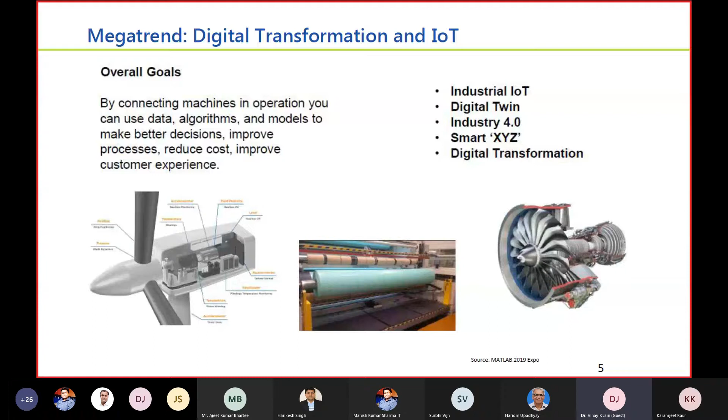So the Industry 1.0 era starts from the earliest 19th, or we can say the end of the 18th century, where we worked with mechanical machines which are powered by water and steam. So for this era we call it Industry 1.0.

And after that, by innovations, we reduced the mechanical efforts, and we come to the era where we invented and innovated in terms of electricity and mass production of products and devices, which we call Industry 2.0.

And later we come to Industrial Revolution 3.0, which started at the beginning of the 70s, where we use microprocessors, electronic devices, and information technologies to make production autonomous.

And then, in today's stage, we call this stage between Industry 3.0 and Industry 4.0, where we use cyber physical systems.

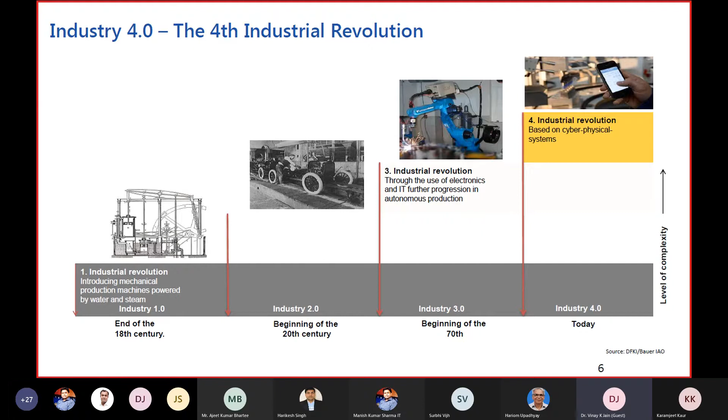So in the phase from 1760 to 1840, we use mechanical production in terms of railways and steam engines. And in 1870 to 1940, we have mass production of electricity, and products like cars and motorbikes come from assembly lines.

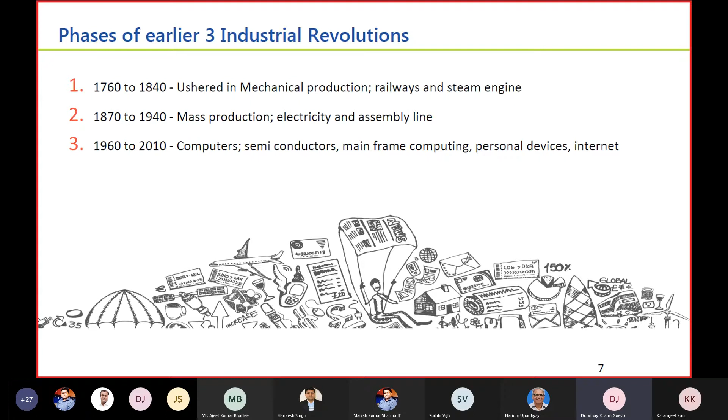And from 1960 to 2010, we have computers, semiconductors, mainframe computing, and personal devices. With the help of the internet, we connect all these things to make the process and life more easy, and drive innovation towards new products.

So for Industry 4.0, there are a lot of different definitions given by different societies. In Industry 4.0, we say it's a collective term for technologies and concepts of value chain organization, based on technological concepts of cyber physical systems, Internet of Things, and Internet of Service.

So it facilitates the vision of the smart factory, because over the last 5 years we have been focusing on making the factory totally automatic - we call this automation the smart factory. Within this modular structure, the smart factory of Industry 4.0 will create a virtual copy of the physical world, like a physical industry - a virtual copy of a physical factory.

So the benefit of these smart factories is that the decisions are decentralized. The smart factory or manufacturing process will be in a form of decentralization, meaning all the decisions are taken on their own - the machine will take its own decision, not a particular person making the decision based on the physical things.

So over the Internet of Things, cyber physical systems communicate and cooperate with each other and with humans in real time. This gives us a chance to communicate directly with the physical system for every device. A person can directly communicate through the medium of cyber physical systems to control the systems and see the overall picture of a particular device - whether it is working well, or whether there is a chance of failure of that particular part.

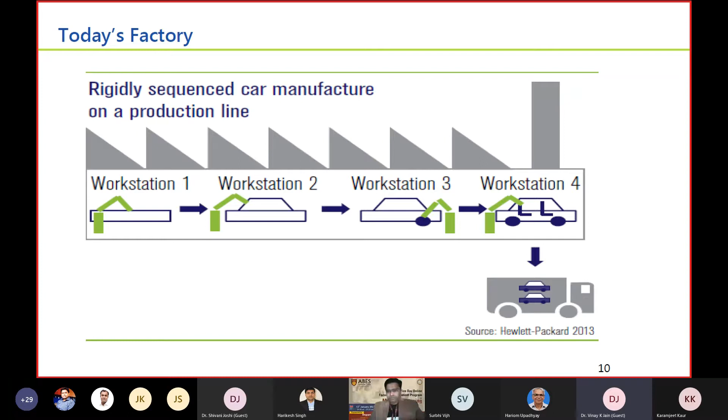The manufacturing happens in a sequential manner, and then it will be transported to different locations, protected for the transport.

In tomorrow's factory, we use a decoupled, fully flexible, and highly integrated manufacturing, where when we give raw material to workstation A, the factory will automatically decide which workstation the particular product will go to.

These types of smart factories will increase the efficiency of the factory, and we can produce more. We make the system more productive in terms of workforce and time saving.

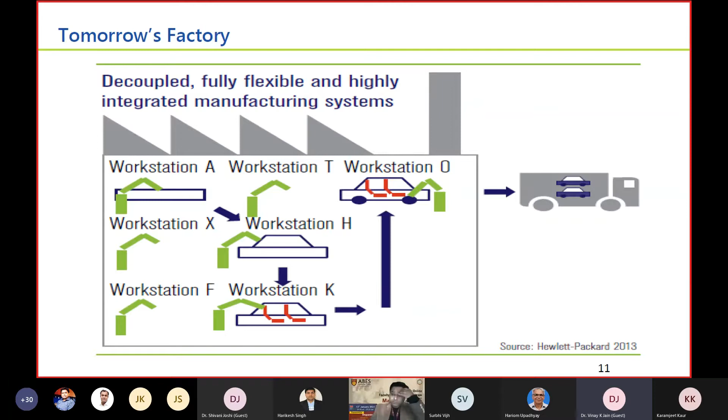In terms of Industry 4.0, how will it work with internet technology? It goes for technologies like Internet of Things, services, and data.

We have heard a lot about IoT. IoT will provide communication between different objects based on internet technologies, like RFID, barcodes, Wi-Fi, and Bluetooth.

For this, we need a particular address to identify a particular device. Currently we are using IPv6 addresses for different devices, which helps in communicating between them. So for IoT, every physical object will be equipped with some address, and it can communicate with a different object.

Second, we have the internet of services. It provides internet-based services to different processes, such as engineering, logistics, and production. It's just like service-based added value for machines, for people, for products.

Internet data is generated for all these processes, a lot of data. This data should be stored in a particular storage system, and we can analyze it through different mediums and platforms using technologies like deep learning, machine learning, and so on.

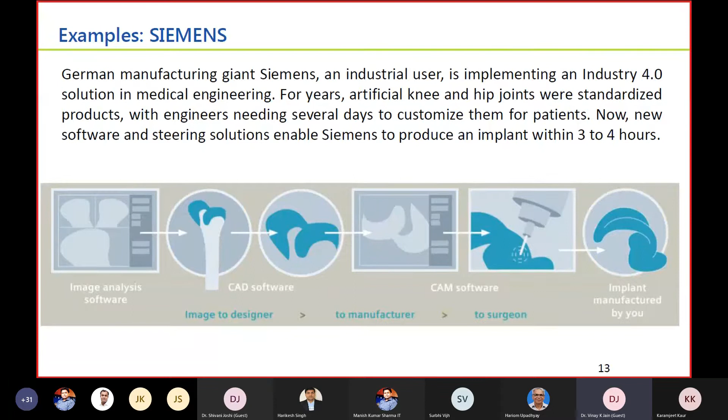But by using, as you can see in the picture, we have X-rays of the knees in the software, and we convert these particular images to transform them into an artificial knee for the particular patient.

Another company currently working on Industry 4.0 is GE, which had their own operating system called Predix. Predix is basically used to connect different industrial equipment. In a particular industry, there are many types of equipment connected through sensors, and these components generate a lot of data. When we connect all these components with Predix, all the data comes and gets stored in a particular database. So Predix gives new solutions for all the companies which generate a lot of data from different sources.

Some data is like OT system data, where we have the control process data of all the devices. We also have external data, like weather conditions, human resources, and all these things, clubbed in one particular space. By using this data, we can monitor, analyze, and know the events of a particular process. If we need that data to build models, like a digital model of a particular process or product or production process, by having data from the past, we can develop a new model on the basis of past data to analyze more accurately and form a new model or new industrial applications.

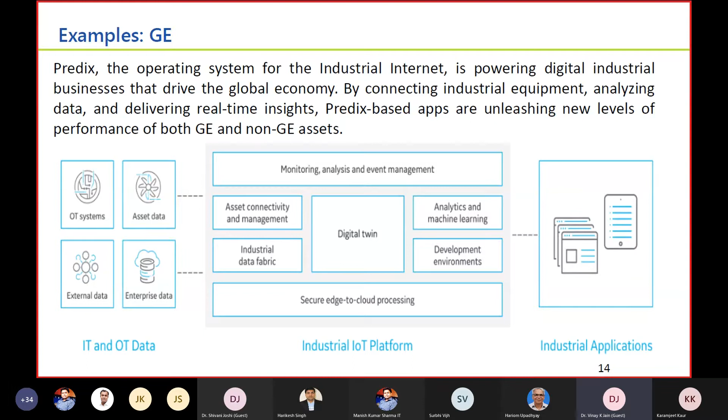There is another example for laser technologies: a German toolmaker called Trumpf, which developed a concept of a social machine, where we model a particular machine on the basis of the input given to the system. For this, we just give the details of the product, what we want for it. We assign the parameters to the particular product, and by using the Trumpf toolmaker, which is one of the best in the industry, it will give you the whole particular product in terms of accurate modeling.

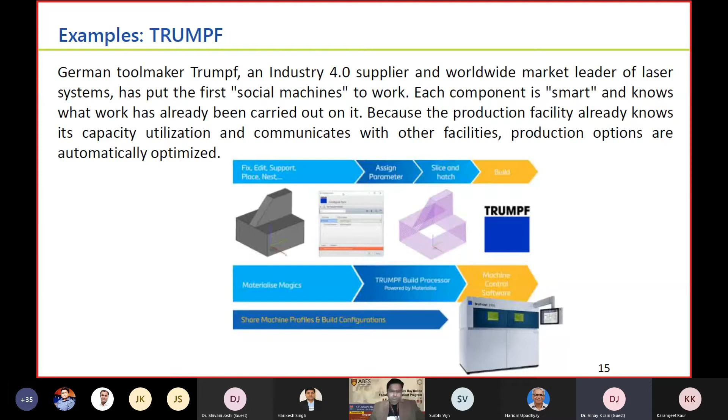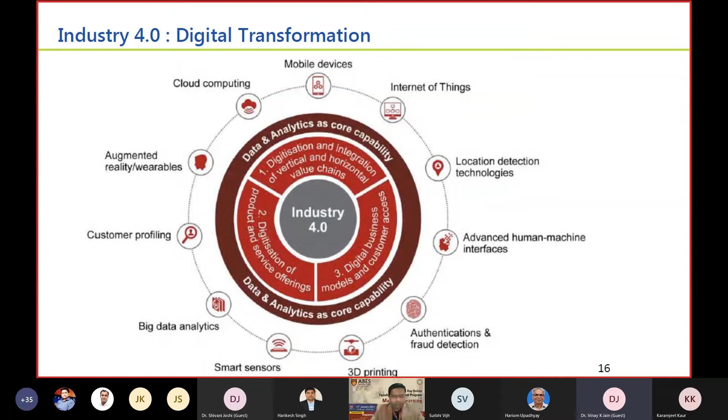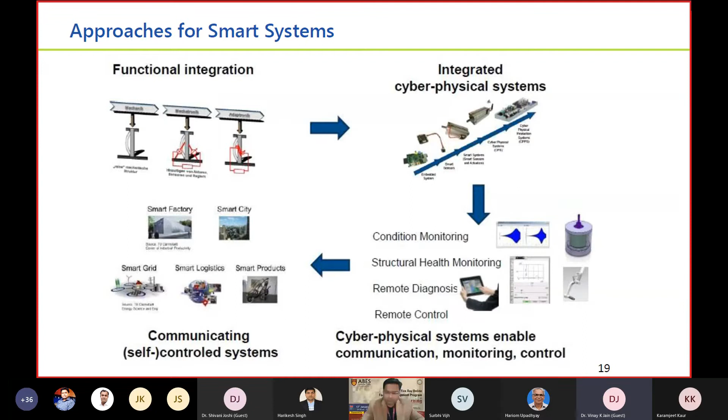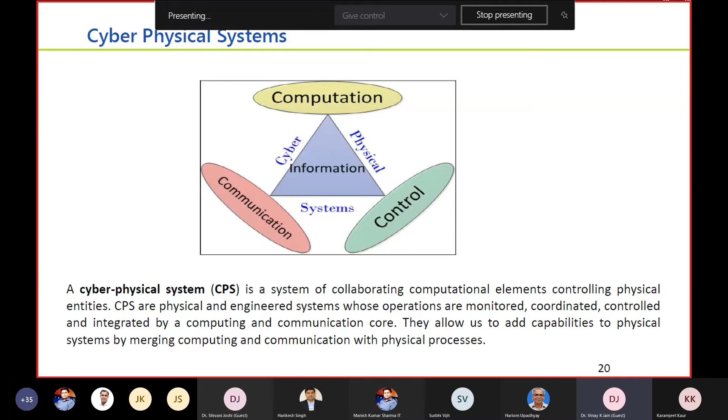So we have communication between physical objects with the help of sensors and IoT, which communicate directly with the cyber world. So there are some principles regarding Industry 4.0.

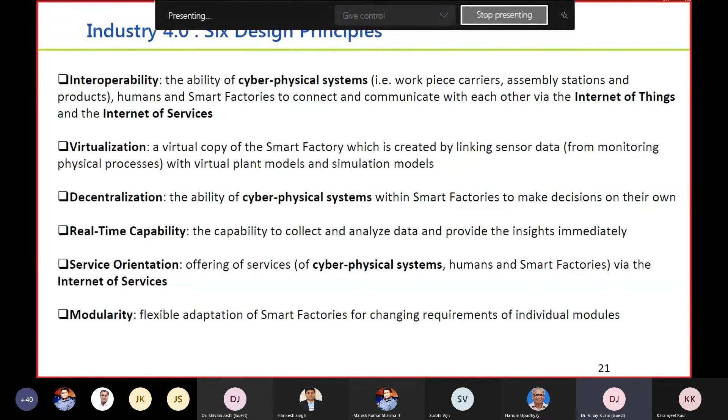Then service orientation, the offering of services of cyber physical systems to humans in a smart factory via the Internet of Services. Then modularity is the adaptation. Generally in an industry we have different components with different assembly lines, and if we change something in a particular pipeline, adaptation is very difficult in the current scenario, because some components only work with that specific component or frame. But with a smart factory, if we replace some component on an individual basis, the system will adapt, giving flexibility to the system that enables the smart factory to run.

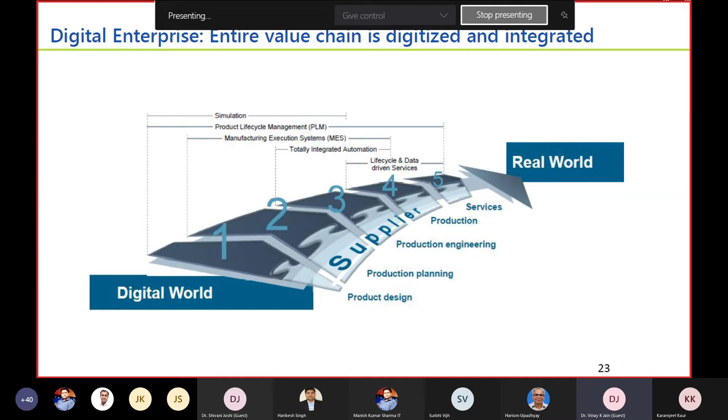If everything is going right, we go to the manufacturing process, where we start to manufacture the product through smart factories, then move toward the industrial process, which is totally automated. After production of the product, we go for the life cycle and data-driven services. For example, in manufacturing a car, there are lots of sensors which come with the car and generate data, which is stored on the company's servers. They can then analyze the behavior and performance of a particular car, which helps them improve the whole product by analyzing all the data in the real world.

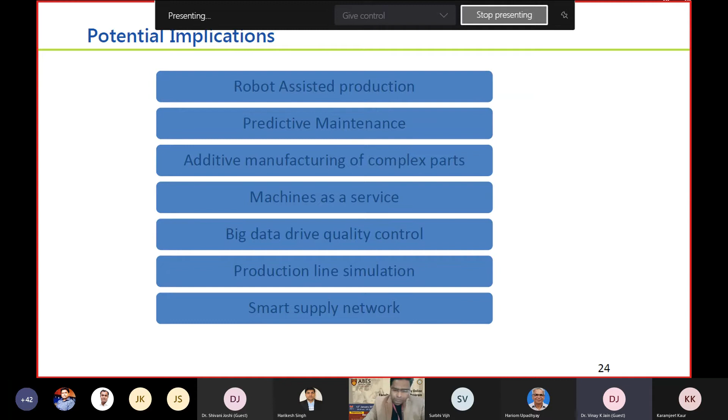So what is digital twin? There are multiple definitions of digital twin. One definition is it's a cross domain digital model that accurately represents a product, process, or performance of a product or production system.

Some call it a near real-time digital image of a physical object or process that helps to optimize business performance. Another definition is a representation of a physical asset that has a level of completeness and accuracy, including context information that allows the user to understand its behavior and performance.

In short, the digital twin concept combines the idea of modeling and the IoT. Before that, we had some prototypes, like if we want to develop a car, we have a prototype of the car in terms of sketches, like building a structure. Before that, we had a design that would not connect with the internet.

So the digital twin model just has a prototype of a model which has the capability to generate data, and that helps, with the help of internet technology, to communicate with this particular model.

So digital twins are the virtual replica of the physical device, and it helps data scientists run simulations before the actual device is built and deployed.

In most cases in industries where there is availability of data, they form this before launching a product or building a device. Firstly, they make a digital twin model of a particular product where they include all types of processes in that digital model, and then they simulate the model under the whole conditions and controls, and the behavior of the particular device in a physical way.

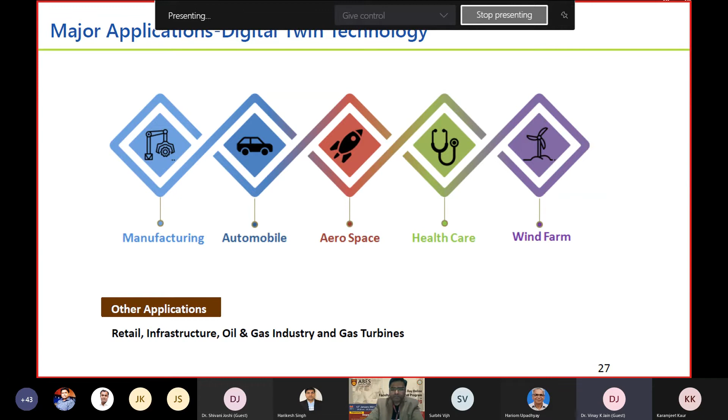There are some other applications of this in the retail industry, infrastructure, oil and gas industry, and gas turbines. One of the major examples of this is in industrial technology in oil and gas.

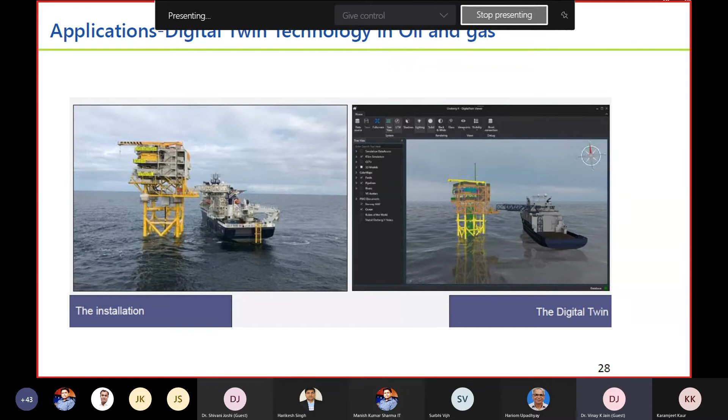Like you have the real-time installation of an oil extraction and exploration plant in the sea. We have a digital twin model of the same particular physical model, which runs in customized software, where we build the same physical system in a virtual space, so we can know the real-time condition, the real-time cost, and real-time behavior of all the processes used for implementing this particular installation in the sea.

A second example is the hydrocracking process. In hydrocracking in the oil and gas industries, we transform heavy molecules into lighter, high-value products such as gasoline, diesel, and kerosene. These products depend on quality, which depends on experimental conditions, process optimization, and catalyst selection. So for deriving a novel catalyst, accurate prediction of crude oil properties is very important.

In my work, we develop a digital twin model for the hydrocracking process, which relies on different aspects where we model property prediction of the crude oil, and also with the help of different components which help filter all these products from the particular refinery.

We develop multiple models, starting with a digital model for the furnace, then the reactors. With the help of these digital models, for the next refinery to be built in upcoming times, we simulate the whole model in a digital twin, with all the processes and kinetic models and information we need, and run the whole refinery in digital twin modeling to get the right information about the product based on these processes.

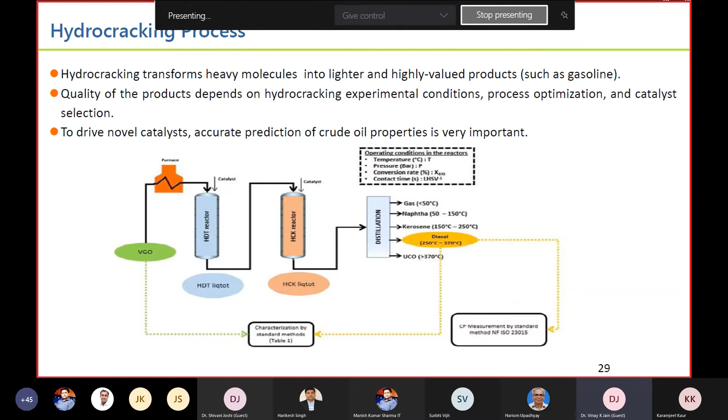The benefits of the digital twin model are improved quality and yield, and improvement in terms of skill development. It increases the efficiency of engineers because they can know prior information about a particular process or production process of a product. It reduces overall cycle time and boosts productivity.

It helps us in maintenance, helps us diagnose failures before they occur, and optimizes robotic operation management. Currently in industry we have a particular assembly line with pre-programmed robotic operations, so we can optimize, based on data, how we run the overall operation of the robotic arm, which also reduces the operation cost of the industry.

The constituent parts of a digital twin in industry include physical assets integrated with different sensors. With the help of these sensors we get real-time information of all these assets in terms of digital information, and we develop a digital model of the physical model. With the digital model, past generated data from the physical model is used to train our digital model, like in terms of the refinery we developed.

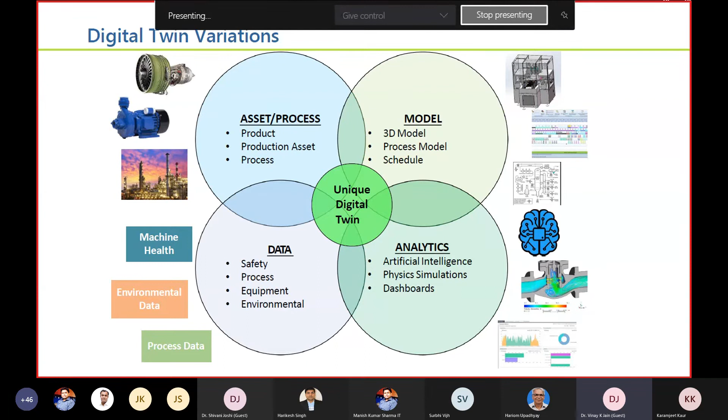So why are we discussing digital twins now? Basically, for a digital model, it's about building an information model, or information modeling, which helps in digital manufacturing of a particular product. With the help of simulation technologies, we can know more about a physical object in digital terms, using 3D scanning and photogrammetric methods.

For our digital model, we need a data acquisition method, where with the help of the Industrial Internet of Things, we can acquire all the data from different sources in the industries. To analyze all these things, we use analytical tools such as machine learning based frameworks, which help us get more accurate information and develop models that increase efficiency and reduce the overall cost of the process.

Some of the data acquisition processes include edge device technologies and 5G communication, which in the future will help get more data with fast and secure transmission.

With the analytical tools, all the data comes into cloud computing, and the clouds are used for the power of simulations and big data analytics, in terms of Amazon Cloud Service and Microsoft Azure. All these cloud companies have the power to analyze these things in real time, and the backbone of all this is to save the data securely in terms of cyber security.

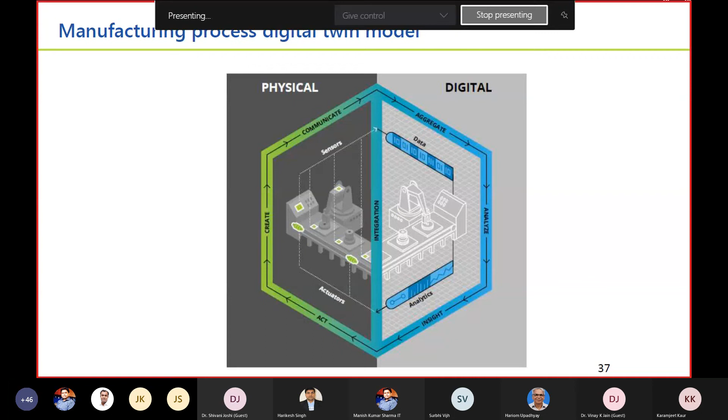So basically, there is a digital twin conceptual architecture. First, for the digital and the physical process. Firstly, in the physical process, we create a physical process.

With the help of communication technologies like RFID, Wi-Fi, and Bluetooth, we can acquire the data, and this data comes into the cloud in an aggregated manner, where we have a digital twin model and we can analyze the data and assess it.

This will provide different frameworks in terms of laptop, pads, and mobile. So the main purpose of this process is to standardize and provide the security of the data and connectivity.

In particular industries, we have the conceptual information in terms of the physical process, we have data for different processes in terms of weather, temperature, all these things. This data comes from the ERP, MES software, CAD models.

And sensors that detect all the physical entities, such as pressure, temperature, flow, and these actuators help us with the hydraulic movement of all the things. With edge processing and edge security, we can integrate all these things.

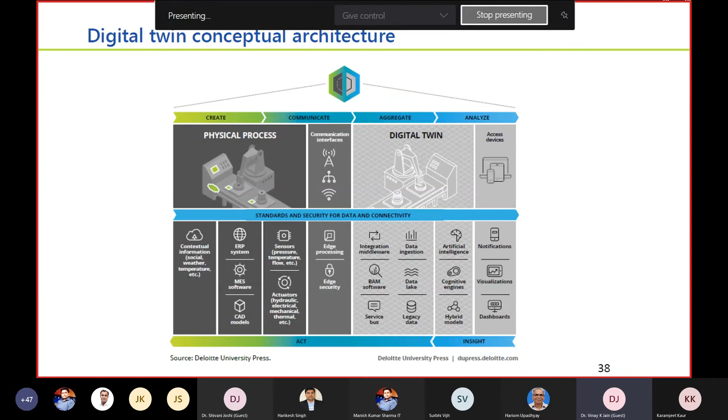So an overview of getting started with digital twin. The first one is to imagine - the process is to imagine what you want to build.

Also, to make a digital twin model, you have to imagine and assess process opportunity for a digital twin model, and to identify what are the important process data and the area that you need.

By using this, we have to develop a pilot model, which is a virtual model for a physical entity.

With this, we stabilize the pilot and mature it. We use multiple simulations and different process data.

Now we are at the stage to add and remove some processes from a digital twin model, then we monitor the whole process so it works fine, and it helps optimize or increase the efficiency of the process.

So basically, project and performance digital twin - there are two fields, the green field and the brown field. In terms of project digital twin, we first plan, design, and engineer the whole product.

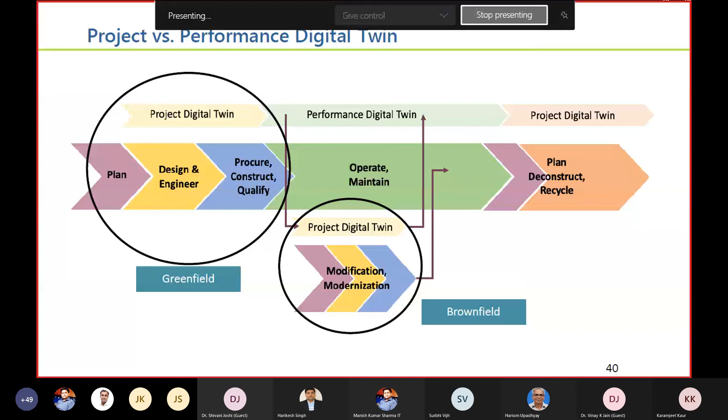When we have the brownfield, once we decide that a model is particularly better than the previous model, we will plan to construct that particular product, on the basis of modeling and simulation.

So in terms of modeling simulation,

Hello. Okay. Hello, Vinay sir. Hello. Yes, I think there is a problem in the network. Now it's okay.

So in terms of the assessment cycle, digital twin helps in the overall assessment cycle of a product in terms of modeling and simulation, virtual commissioning, maintenance, and fault detection. It helps in the convergence of whole design to build and from operate to maintain. This distributed model helps increase throughput, improve product quality, optimize demand and supply requirements, and improve the minimization of energy cost.

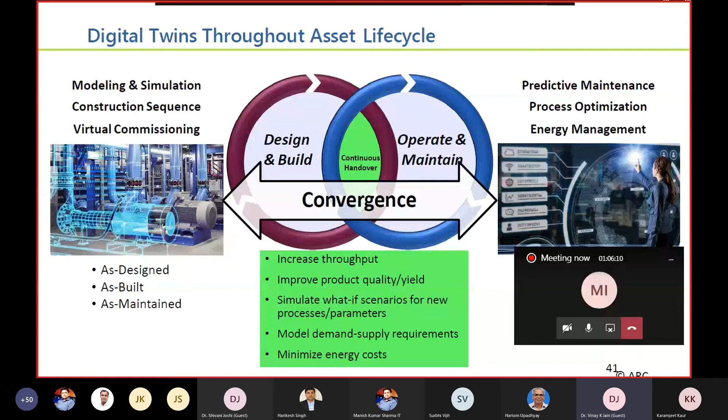So in terms of maintenance in digital twins, we are more focused on predictive maintenance, where all the machines, all the particular components, are equipped with different sensors, and these sensors generate data, and this data can help us know of a failure before it occurs.

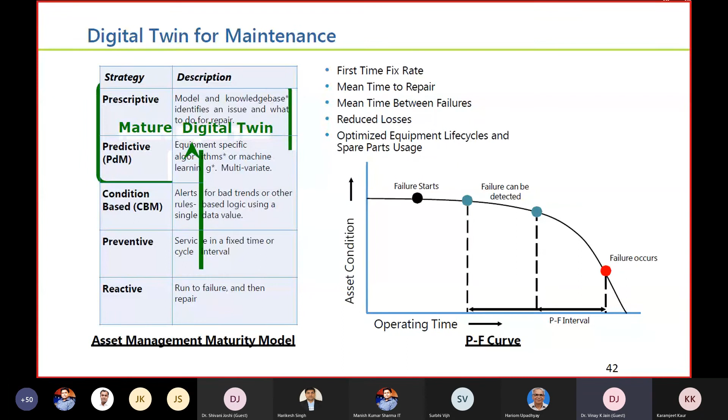So it will provide an assessment towards the model for maintenance. Considering your digital twin initiative, it will basically help the economy of data. It will increase the volume, fidelity, and applications, and the collaboration of different processes to build, maintain, and utilize, and it also helps data governance and scalability, where with more data we can analyze more and use this data to enhance the skill of our workforce.

So digital twin business values relate in terms of quality. It will improve the overall quality of the whole supply chain process. It will predict and detect quality trends before they occur, and it also increases control of quality if something happens in a quality issue. Warranty cost and service,

it understands the current configuration of equipment in the field to be able to service more efficiently. It proactively and more accurately determines warranty and claim issues to reduce overall warranty cost and improve customer experience.

In terms of operation costs, it improves product design and engineering change execution. It improves the performance of manufacturing equipment and reduces operation and process variability.

In terms of record retention and utilization, because we have the digital record of all the serial parts, we can manage it very easily, and it will also help in warranty claims.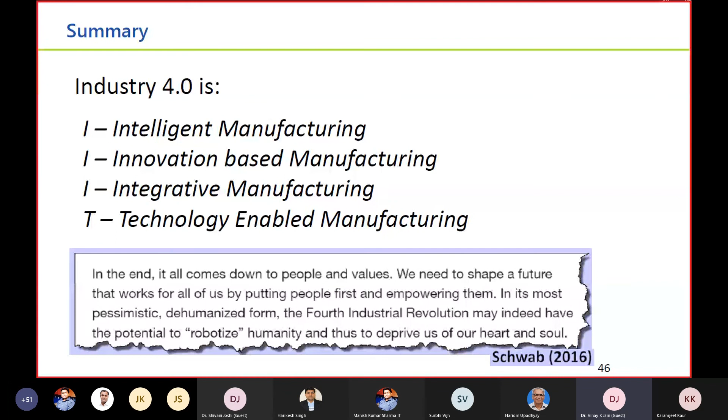There are many phases of digital twin, and we have some examples on YouTube where some companies posted their new models for Industry 4.0, for GE, Philips, Ansys, and Simulation. So in summary, Industry 4.0 is based on intelligent manufacturing, innovation-based manufacturing, integrative manufacturing, and technology-enabled manufacturing.

So for further questions.